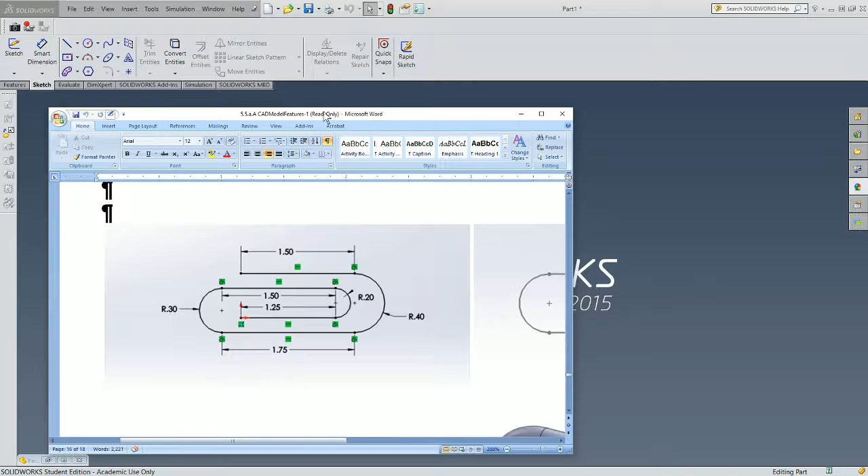This is Module 5.5a, and today we're going to work on our paperclip layout. And what the paperclip exercise is about is really learning a little bit about sweeps, and it's an introduction to the sweep. So a sweep is really to project a geometric shape along a path. And in this instance, our shape that we're projecting is a circle, and the path is the bent outline that a wire would be bent for to make a paperclip.

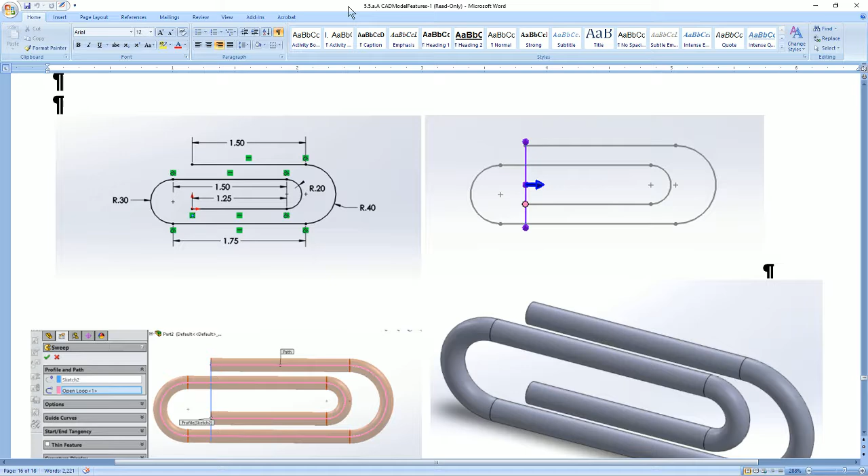So you'll see that I've given you some dimensions in a sketch, a fully defined sketch up here for you to use, and we're going to talk about the sweep. So that's what the sweep requires. Two things: a path and then a profile. The profile must intersect the path. So let's start out with drawing in a new sketch here. So I'm going to go File, New, Part. Okay.

If I go to Features, you'll see I don't even have Swept Boss available as an option, and that's because I don't have enough information to do that particular action. So let's start out with a sketch in the front plane of our geometry. Good practice. I'm going to start at my origin, and I'm going to go ahead and start doing my layout.

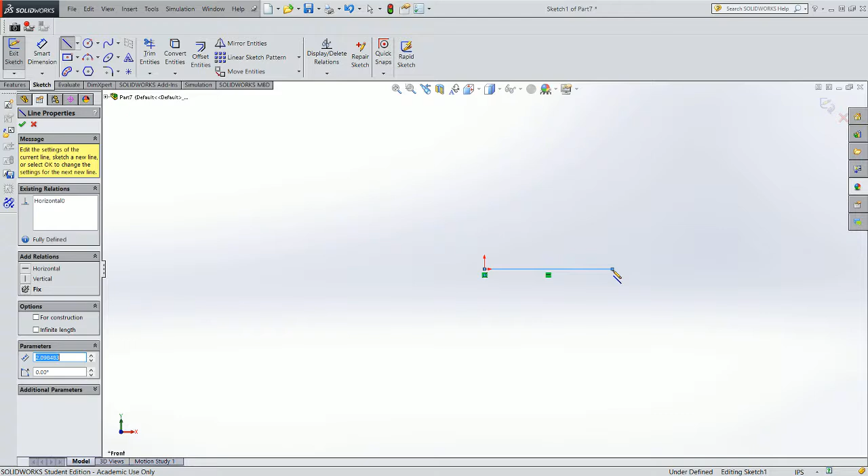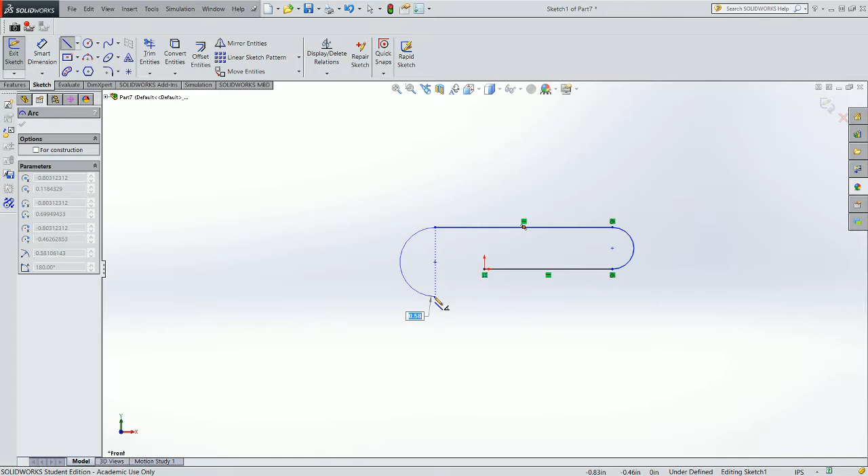Now, you'll see I get my horizontal glyph, that little yellow line, drop my line, and I could just stretch a line out, or I could insert an arc. But if I come back with my tool and I touch the dot and I get that little circle, concentric circle, I am now doing a tangent arc. There's a tangent arc of 180 degrees, and it keeps my tangency relationship for me. So it's really a neat thing, a quick way to draw and to just lay out really quick and accurate drawings. Come back, touch, get my arc.

Whoops, got the wrong kind of an arc there. Touched the wrong thing. If you get the wrong arc, it's no big deal. Just come back and pick it again. So there I've sketched my paperclip. A lot of different ways I could do it. I could sketch a line, and I could then go and choose a 3-point arc. Do something like that.

And then draw a second line. I could do all of that. There's nothing wrong with that. It's just not as fast. Reorient it. I could do all sorts of different things. So a lot of different ways to do it. I just showed you probably the quickest and the slickest way to do that.

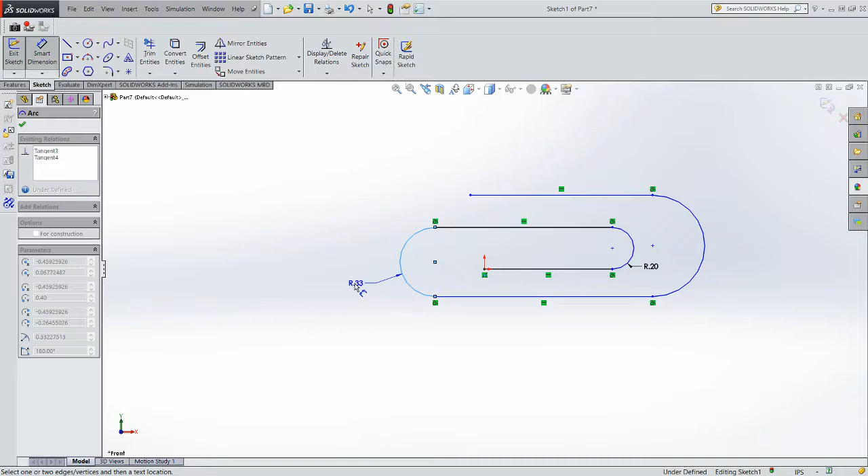So let's go ahead and start adding some dimensions. I've given you sample dimensions. That's not the point of this exercise. You can make it any size that you would like. The point is just to give you something to get started with. So as I dimension here, I'm just going to keep working as I talk. And you can take a look down at your paper and see the actual dimensions as you go through the exercise if you want to do my dimensions, or you can use yours.

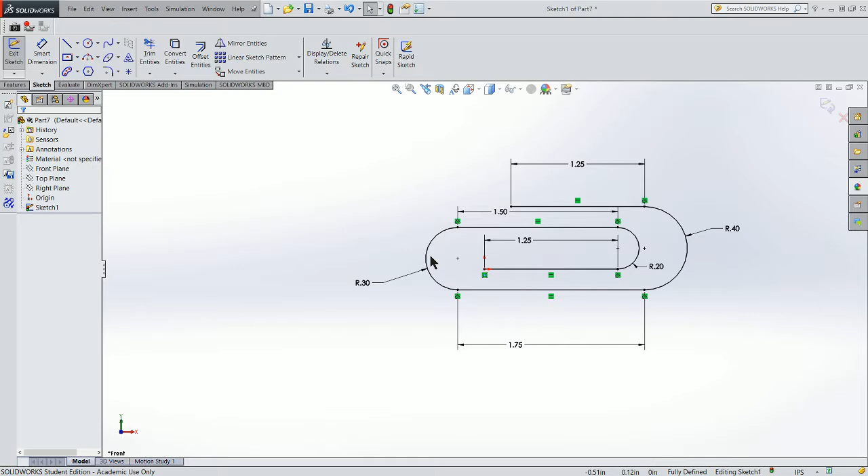I'm going to leave this a little shorter than what I had shown before in my sketch. And I'm missing one dimension here. Sorry. This is, I believe, 1.5. It is. All right. So I've got a fully defined sketch down here. And what I'm going to show you is a way to put a plane into this drawing. So I'm going to do it slightly differently than it's depicted in the handout.

Now, to put a plane in, I want to exit the sketch. And what I'm going to do is I'm going to go to Features and add a reference geometry, a plane. Now, what a plane requires is the definition to be either 3 points that form the 3 constraints on it, an offset plane, or a point and an offset reference, or just 2 offset references, like a mid-plane between 2 faces.

So a lot of different ways to do a plane. So I'm going to do this one using the end point here. So I've got an end point, and I'm going to say it's coincident, so you'll see that coincident is highlighted.

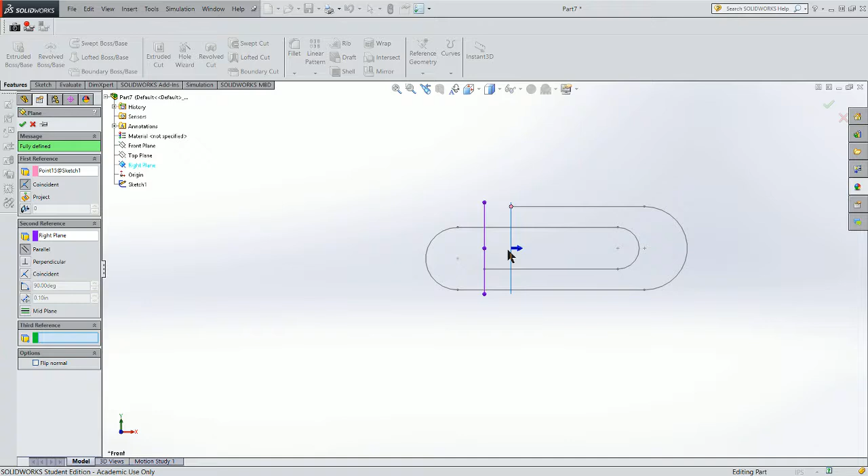In the second reference that I'm going to choose, I'm actually going to come down here and expand my tree, and I can start to see my planes. My second point, I want to make it parallel to my right plane. So you see it's parallel to the right plane. So you see that's my new plane. I'm going to accept that, and I'm going to give it a name. I'm just going to call it my profile plane, because that's where I'm going to sketch my profile. So that's how we put a plane into a drawing.

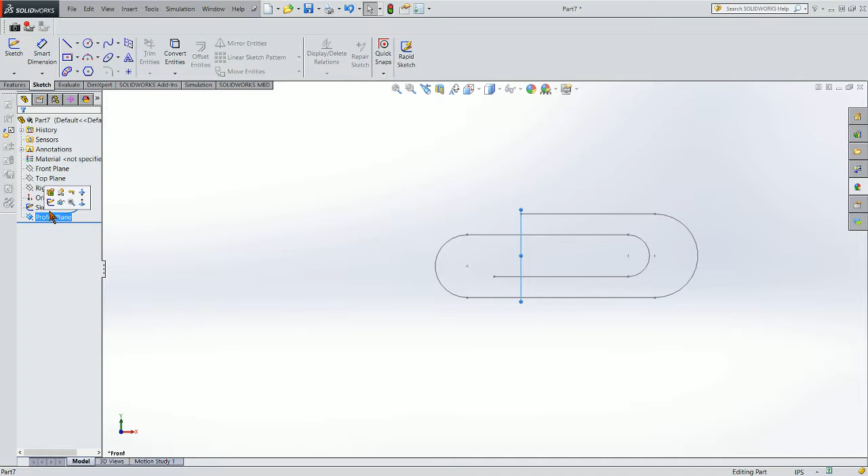All right, so let's go ahead and choose our plane. I'm going to highlight my plane, and then I'm going to choose the sketch tool. And now I'm going to start a circle at the end of my path, and it's going to start in my profile plane here. So I selected that circle, and I'm going to give it a dimension, and let's just call this 0.15.

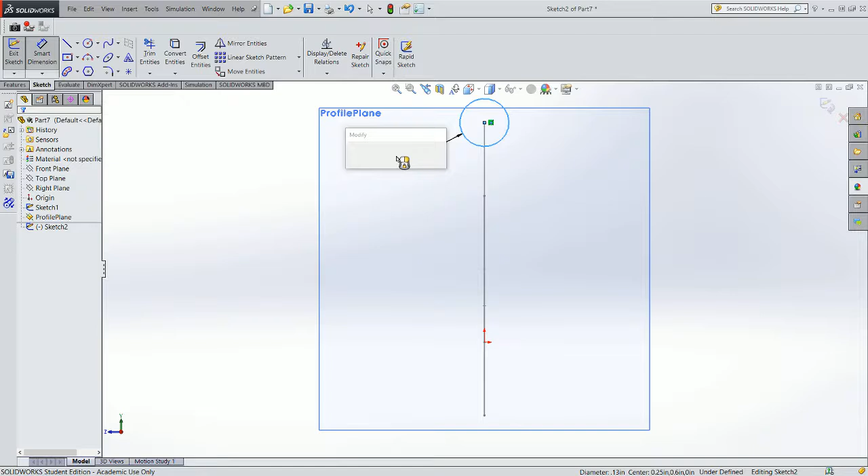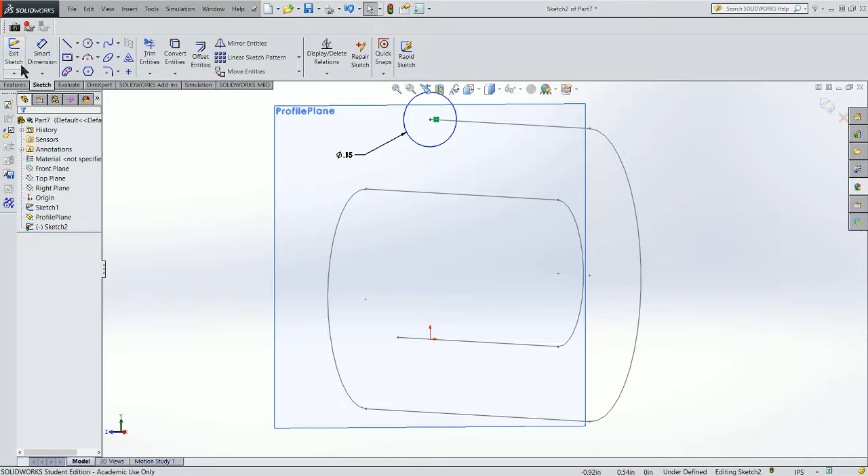And you'll notice that I'm underdefined. And you're like, well, I don't understand why you're underdefined. You're in this plane and you're on that point. Well, the reason for that is I'm not really coincident with that point up there. So let's look at the relationships that exist on this circle. You'll see the diameter is all that's really related there. So let's go ahead and choose that end point. Well, first let me show you what happens if we don't. So I'm going to exit this sketch. I left it underdefined intentionally.

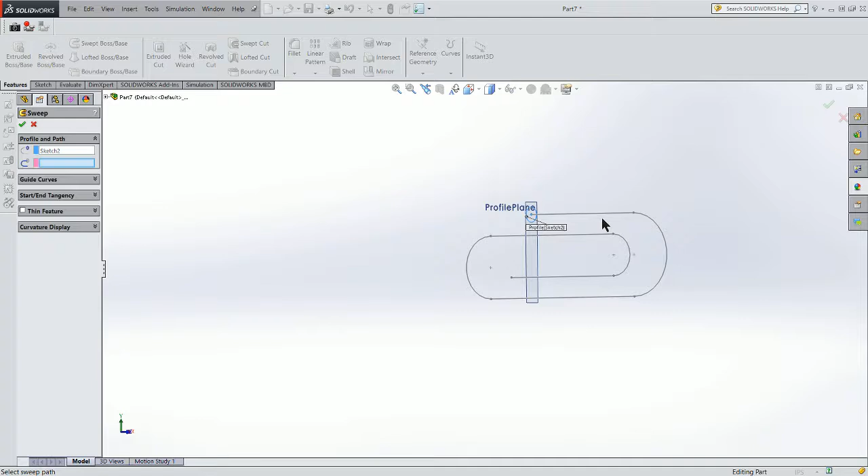And now we're going to come up to our features, and you'll see that I can do a swept boss base. And it asks me for two things. First, it asks me, what's the profile? The first little blue one is the profile, so I'm going to choose my circle. The next thing it asks me is, what is my path? I'm going to choose my path. It's got to be a contiguous path. You go, hey, that works pretty good. No problem at all. I didn't define that sketch. I don't really need to define that sketch, do I? Well, you really do, and I'm going to show you why.

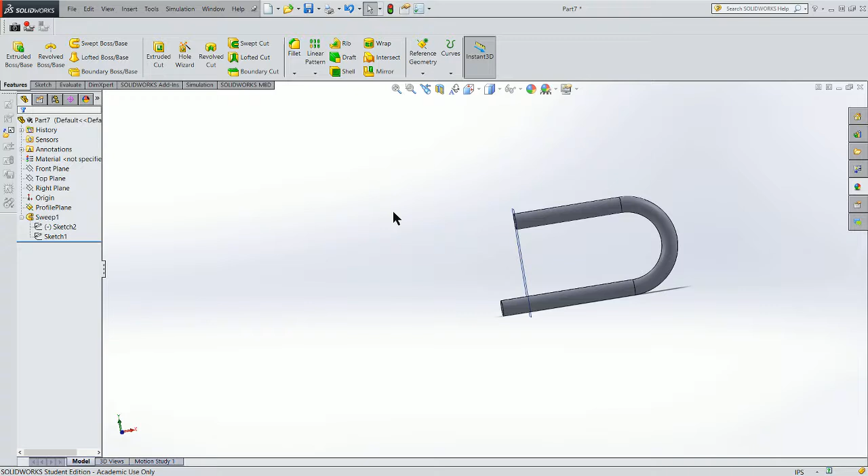Because if I go back into my first sketch and I change this dimension, I'm going to effectively elevate that point where I sketched, and accept that and exit my sketch. What the heck happened? My paperclip just disappeared. What really happened here when I go back into my sketch is I moved my point away from my profile, so I no longer intersect that path.

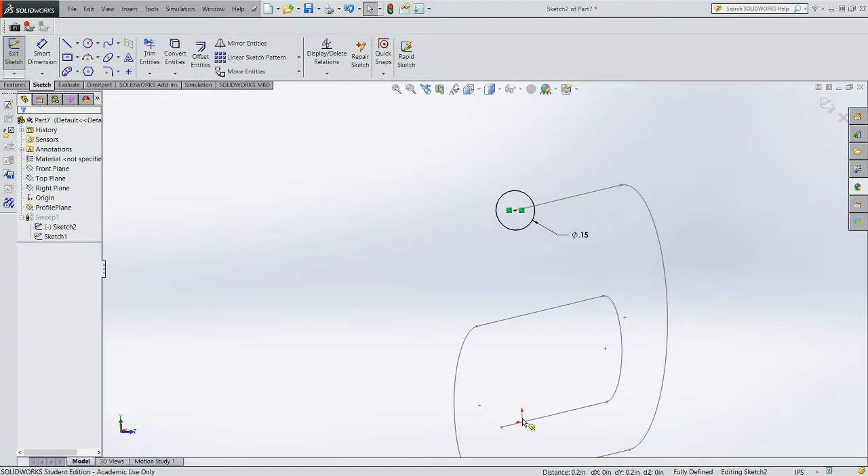So to avoid that, I do need to fully define this plane. What I need to do is associate those 2 points and make that coincident. Once I make that coincident, my sketch goes fully defined. So I've given it not only a size, but a location in reference to the drawing itself, or the model itself. And now you'll see I get that back.

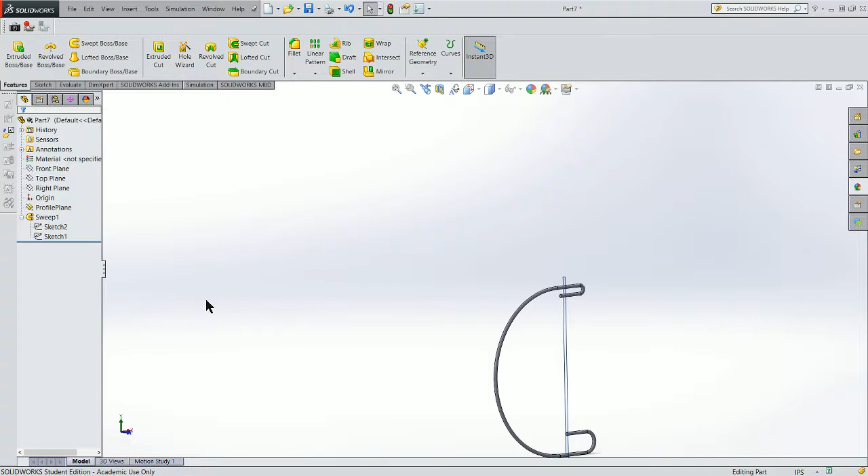And now if I change my path, because I fully defined that, I can change my path pretty much willy-nilly. Make a really weird looking paperclip. And you will see that nothing changes. So it stays contiguous. So let me go back and fix this. That was 0.3, I think. There we go. And now I have my paperclip.

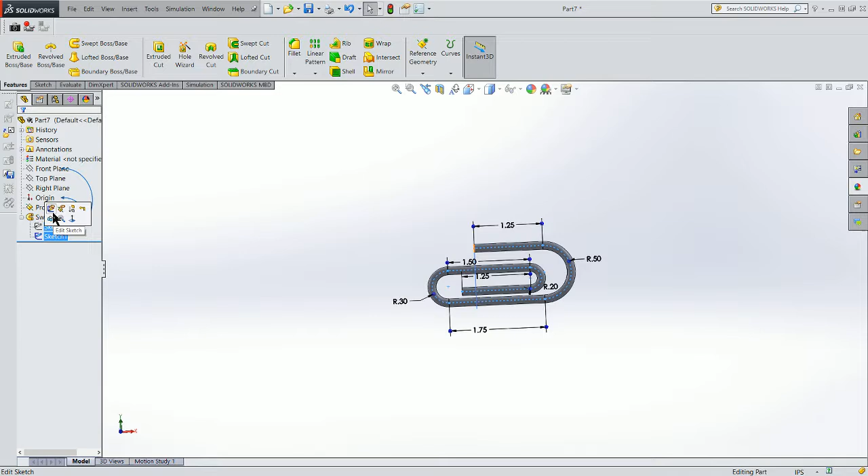So a couple of takeaways from this that we really have to understand. The first one is that we need to have a fully defined sketch when we do our sweep path, and that every single sweep requires 2 components. It requires a profile, the circle, right here, and a path. And the path must pierce the profile. It doesn't have to start at it, it must pierce it though.

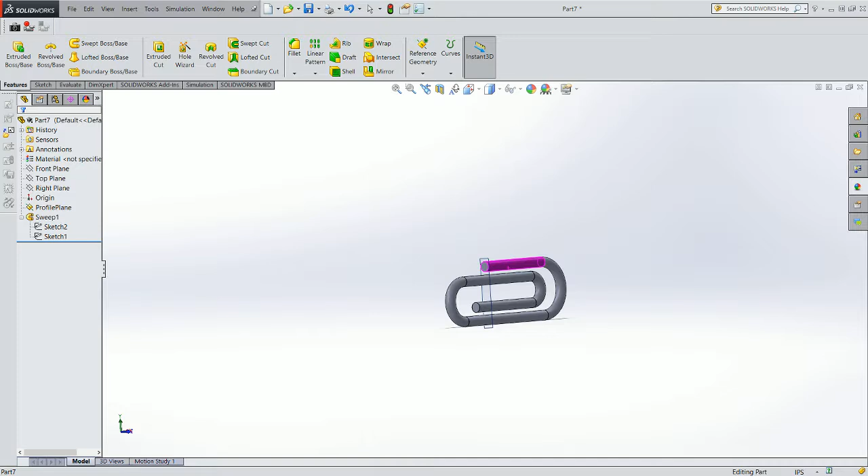So we looked at inserting a reference plane, we looked at making a swept path, and then we also looked at that profile and the effect of not associating our profile with our path. So that's it for this exercise.